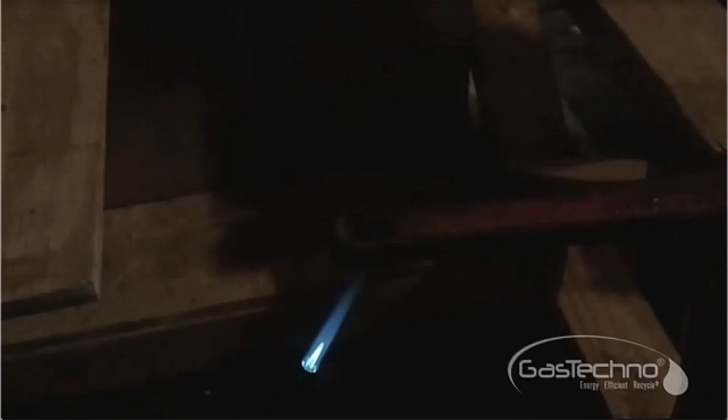December 1st, 2010, we've produced our first production of liquids. We're now going to test the samples. Go ahead, Rich, pour the sample to see. As the sample runs down the hot pipe wrench, you'll see that it's not all water. We've had some excitement here in the last 2 days showing the tests of turning those liquids from our production into flame. We've actually started the liquids on fire, and for us that's an on-site test. If we can burn liquids from our process, we know that we've actually produced fuel as opposed to producing water. That is from converting gas to liquid right there.

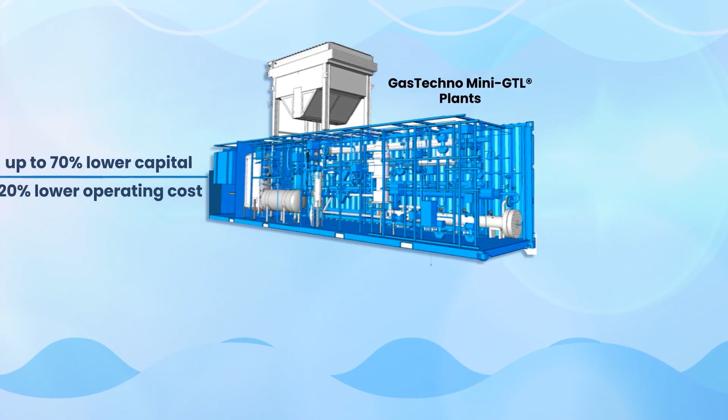In the American garage, the birthplace of many revolutionary companies, is poised to become the world's lowest cost producer of low to negative carbon intensity fuels with its patented, proven, game-changing single-step gas-to-liquids conversion process. In the garage, when the GasTechno team was able to prove the reaction of methane into methanol in its pilot plant, GasTechno Mini-GTL plants produce low-carbon fuels with up to 70% lower capital and 20% lower operating cost. This is a competing technology to the traditional FT Fischer-Tropsch synthesis approach for making diesel fuel and naphtha.

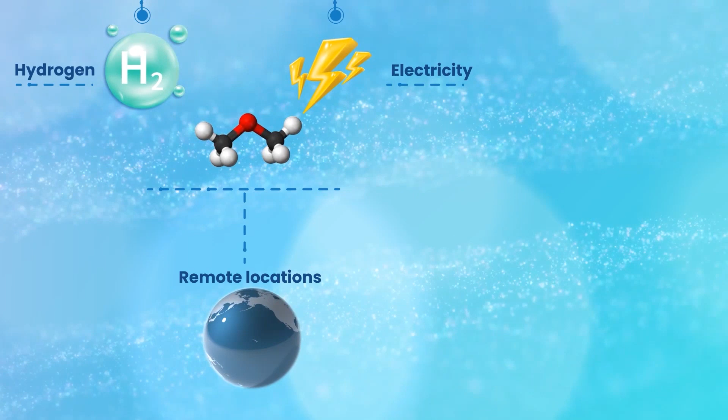Modular GasTechno Mini-GTL plants convert renewable natural gas into low to negative carbon intensity liquid fuels including methanol, ethanol, and dimethyl ether, DME. These low CI transportable liquid fuels can be used directly as drop-in replacement fuels for the transportation sector: trucking, rail, marine, and aviation sectors, where the methanol can be easily distributed and converted to hydrogen or electricity to fuel vehicle fleets in remote locations. GasTechno is poised for explosive growth given the strength of its patent portfolio, proven technology, and the burgeoning demand for low-carbon fuels.

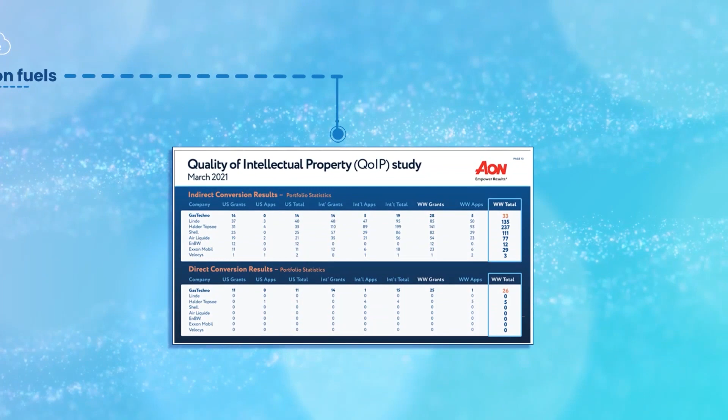According to a March 2021 Quality of Intellectual Property (QoIP) research study by Aon's Intellectual Property Solutions, GasTechno holds the world's largest portfolio of single-step gas-to-methanol patents, exceeding competitors including Linde, Haldor Topsoe, Shell, Air Liquide, ExxonMobil, and EnBW.

History: evolution of the company. 12-year anniversary celebration on December 1st, 2022. GasTechno Mini-GTL has been extensively tested in the field from pilot through commercial scale over the past 12 years, and the company is poised for massive growth as the world converts to low carbon intensity fuels. Let's look at its step-by-step evolution.

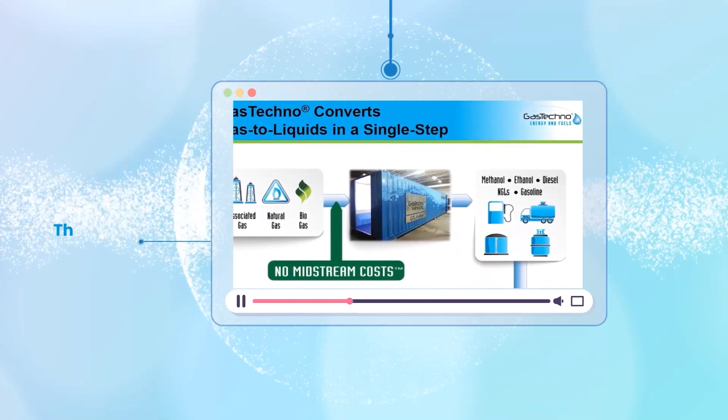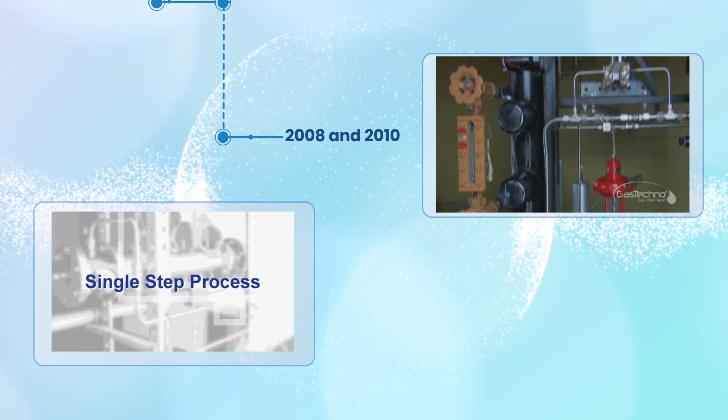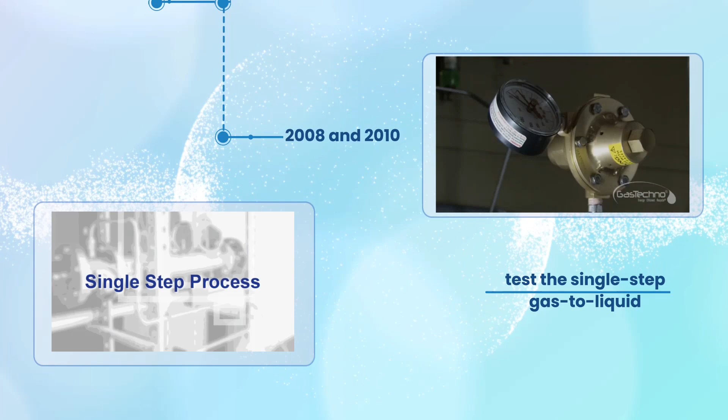It's December 1st, 2010. We've produced our first production of liquids. We're now going to test the samples. Go ahead, Rich, pour the sample to see. As the sample runs down the hot pipe wrench, you'll see that it's not all water. We've had some excitement here in the last 2 days showing the tests of turning those liquids from our production into flame. We've actually started the liquids on fire, and for us that's an on-site test. If we can burn liquids from our process, we know that we've actually produced fuel as opposed to producing water. The primary purpose of this trailer is to bring in customers so that they can see that we are actually producing

Methanol, ethanol, and formalin right from natural gas, right from a methane source.

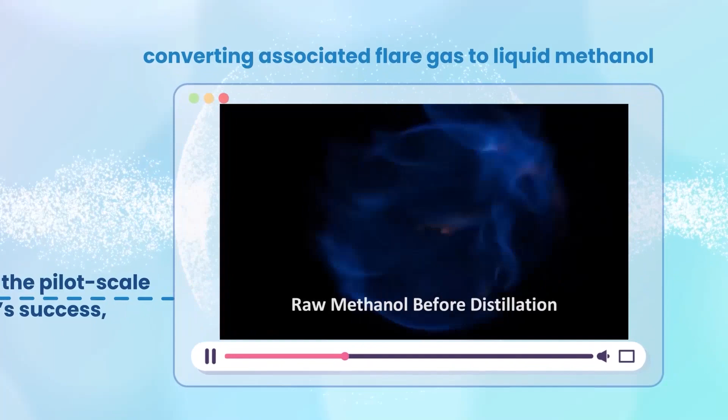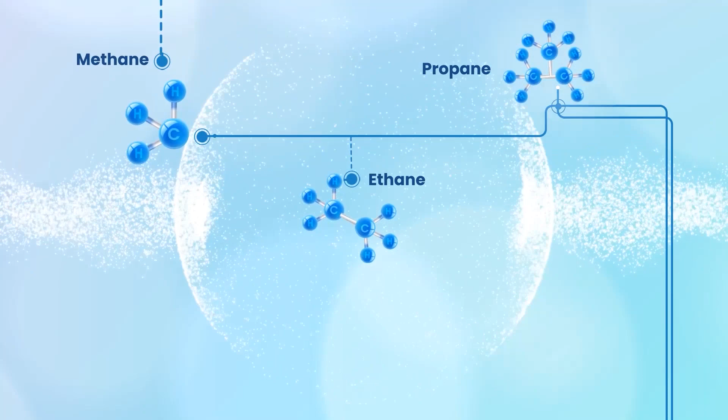It was proven in producing liquid methanol from feedstock gas containing methane, ethane, propane, and 18% nitrogen. In 2012 and 2013, a demonstration-scale mini GTL plant was constructed and operated in the field using both pipeline natural gas and associated flare gas at a site located in Kalkaska, Michigan, to produce methanol and ethanol.

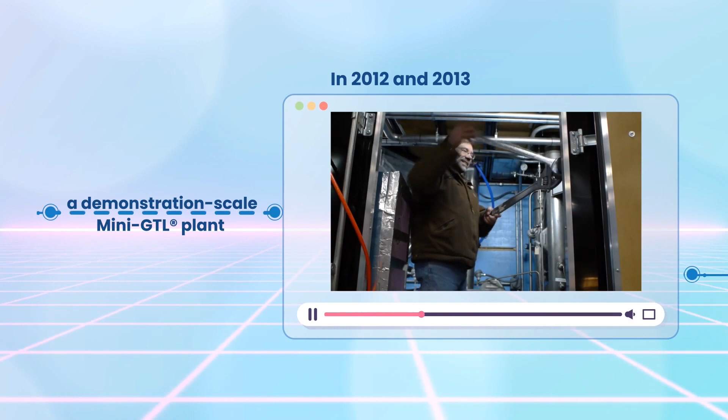Hi, this is Walter Breidenstein, CEO of Gas Technologies. From January to June in 2013, we completed our second plant construction, the portable mini GTL unit.

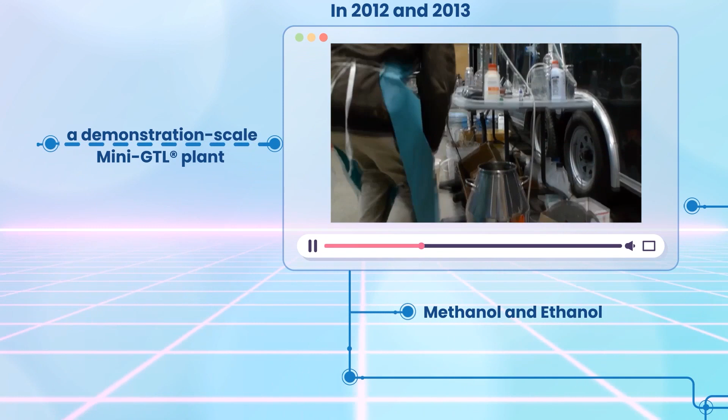With its deep patent portfolio, the spotlight was placed on GasTechno when it was awarded first overall in both the 2012 Intellectual Property Ranking and the 2013 Ocean Tomo IP Innovation Index.

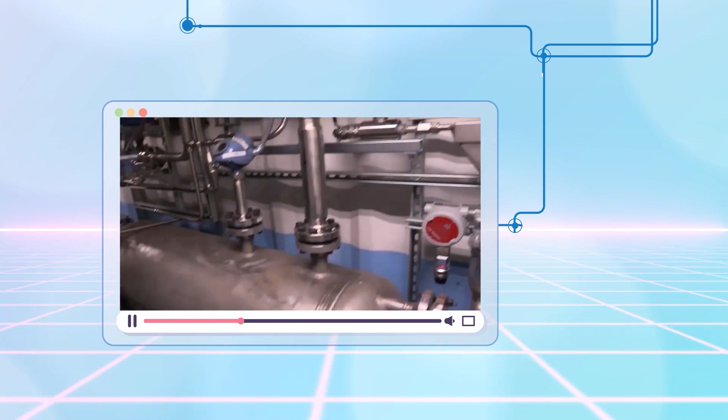That can capture those methane sources and convert them into a liquid fuel that can be readily sold into the market. If you look at a traditional methanol process, it's a 3-step process. If you look at a GTL process, it's a 4-step process. We're a 1-step process. Initiated operation in November 2016 at a gas storage field site located in Ithaca, Michigan.

One of the most significant problems we have today in our generation is climate change. One of the big issues is CO2 emissions and methane emissions.

GasTechno solves that problem. We take gas flares from oil wells or gas flares from landfill. We can take that methane and convert it into methanol, which is a fuel and a chemical, and take away that flare, installing our plant right there on site.

The commercial scale plant was started and tested using air rather than oxygen through a harsh winter, using on-site powered electricity in sub-negative 30 degree Fahrenheit temperatures. The GTL plant and facility uptime operations during these months in North Dakota was near 95%, compared to other competitors.

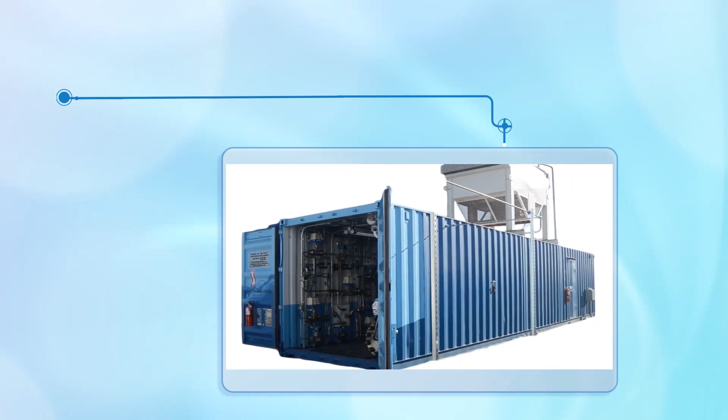Walter Breidenstein lived in a 50-foot Arctic skid shack on site during those 7 months, operating the facility and testing the equipment. A key lesson learned in North Dakota: there has not yet been created the incentives to stop gas flaring of associated gas, given a lack of regulations restricting the practice. We hope that the oil industry will reconsider their position and stop gas flaring in the future.

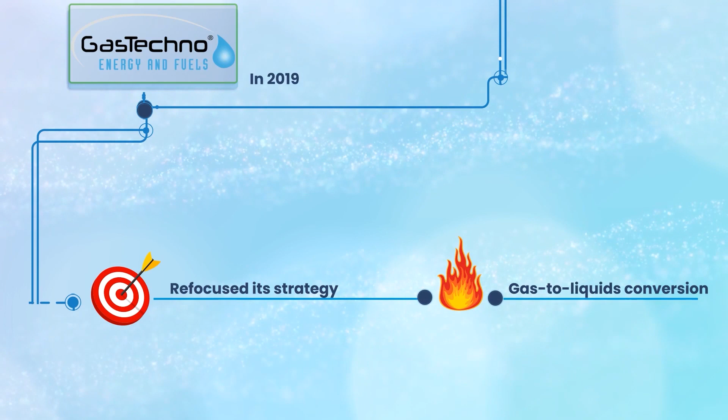Strategic refocus in 2019. In 2019, GasTechno refocused its strategy from associated flare gas to liquids conversion, to becoming the world's leading producer of low-carbon transportation fuels via conversion of renewable gas to liquids.

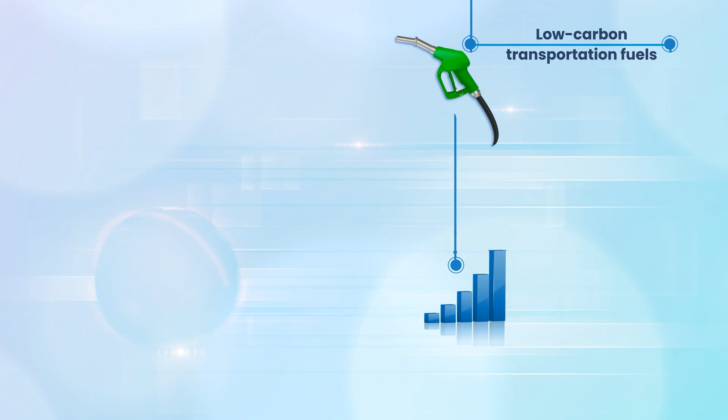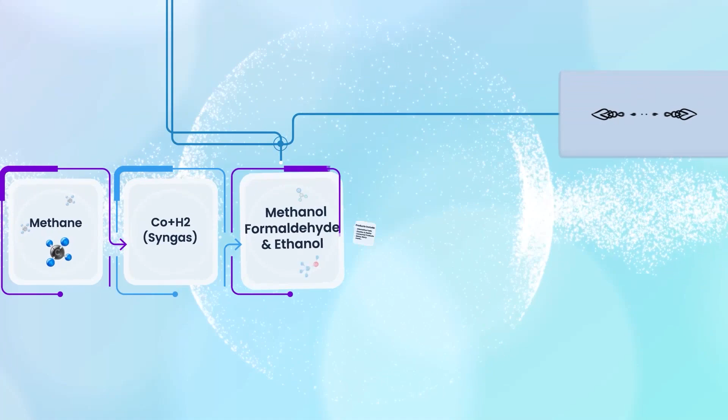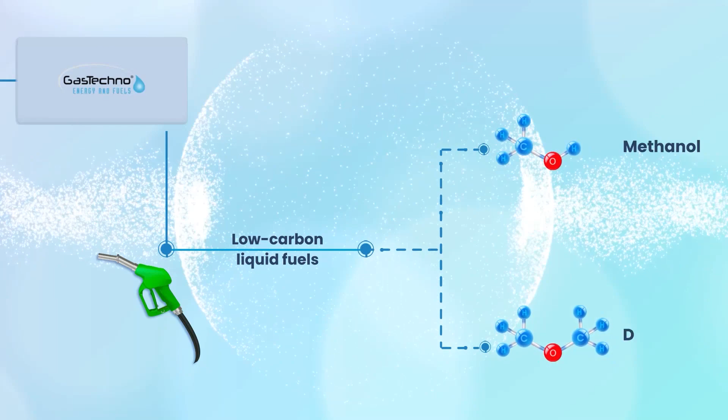The strategic refocus was driven by the burgeoning demand for low-carbon transportation fuels created by incentives under the U.S. Renewable Fuel Standard, RFS, and state-level low-carbon fuel standards, LCFS, coupled with the rapid growth in ESG investing and corporate net zero emission pledges. With its single-step gas-to-liquids conversion process, GasTechno is uniquely positioned to become the lowest-cost producer of low-carbon liquid fuels, including methanol and DME, made from renewable gas or RNG.

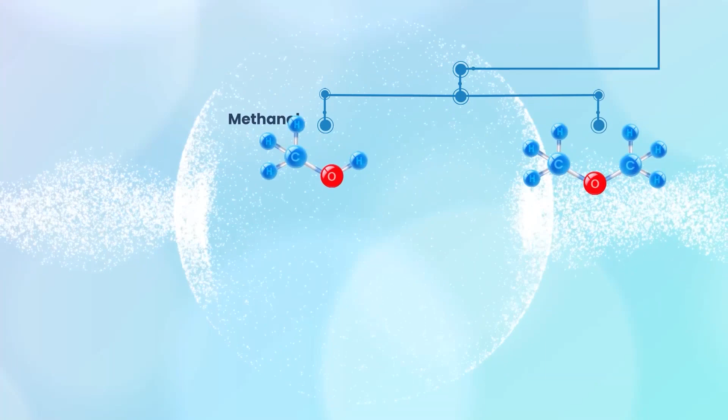The current market is saturated with companies competing to supply compressed RNG, while demand for easily transportable, cost-effective liquid low-carbon fuels is growing rapidly. Besides low-carbon renewable methanol and DME fuels, GasTechno liquids can be easily transported and converted to green hydrogen or electricity for EV charging at distributed locations.

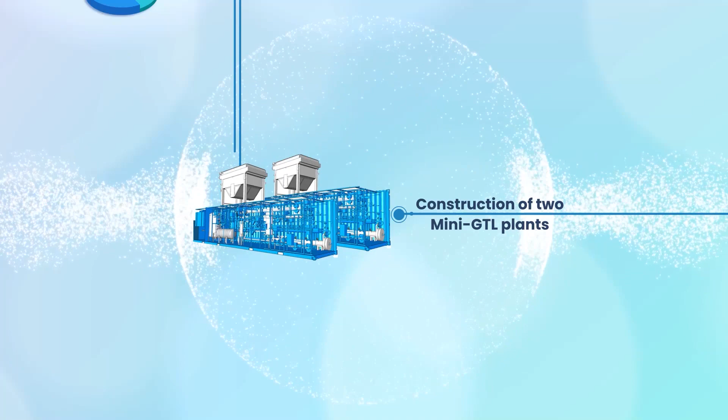GasTechno is poised for explosive growth. In 2021, GasTechno raised nearly $4 million in Series A equity to fund the next phase of its growth, with the start of construction of 2 mini GTL plants to be deployed at its proposed flagship energy center, a retail outlet that will serve as the model for the sale of the full range of low-carbon fuels that can be produced from GasTechno renewable methanol.

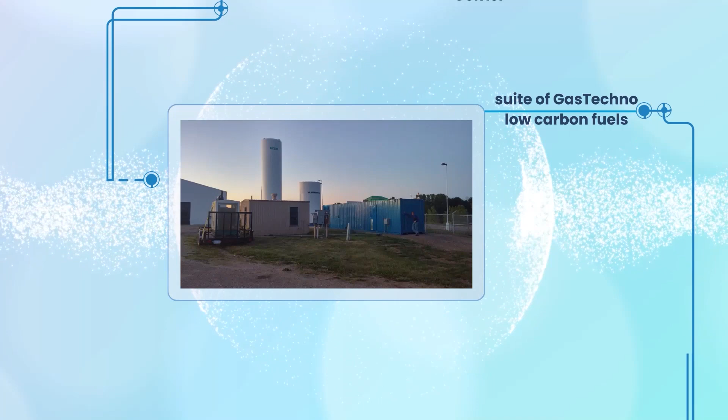Future. In 2022, GasTechno acquired a 36-acre industrial site in Michigan to establish its flagship manufacturing operation and retail GasTechno Energy Center, to produce and sell the full suite of GasTechno low-carbon fuels, including methanol, ethanol, hydrogen, and electricity for EV charging.

With the resurgence in investor support during 2021 and 2022, coupled with ongoing global supply chain challenges, the CEO made the strategic decision that GasTechno will now manufacture its plants in-house at its flagship site.

GasTechno is developing a licensing model for landfill gas and biogas developers that will be funded by its planned SPAC pipe merger during 2023. The company has engaged Winston & Strawn in Houston, Texas, to shortlist SPAC pipe partners that are the best fit with GasTechno.

GasTechno targets high revenue growth within the next 5 years based on the projected spike in low-carbon fuel demand, with support from aggressive decarbonization legislation, including the Infrastructure Act and the Inflation Reduction Act.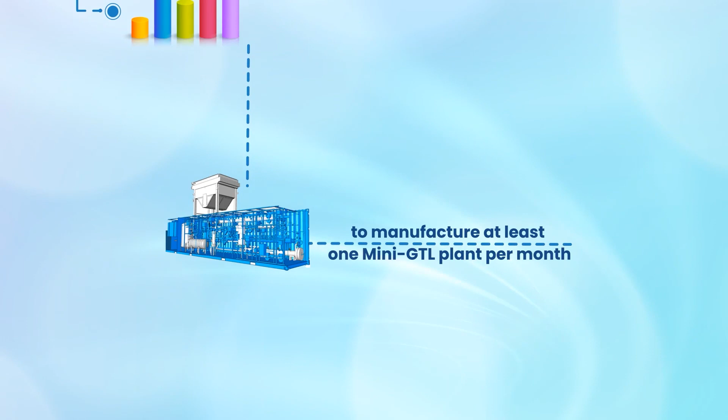To achieve its projections, Gas Techno plans to manufacture at least 1 mini GTL plant per month at its planned Michigan facility, with a target to deploy 30 or more turnkey biogas to methanol renewable fuel projects in 2023 to 2028.

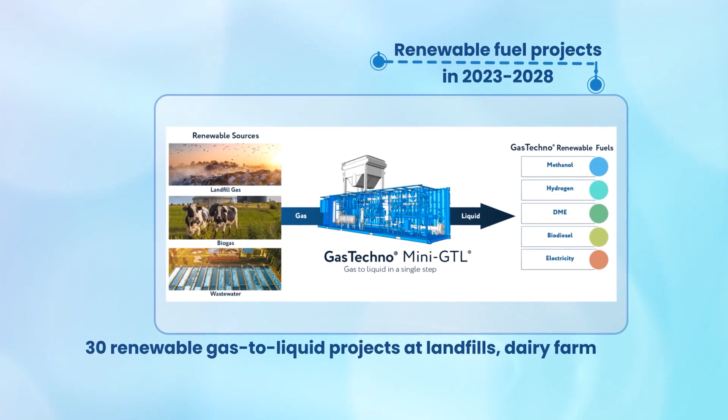Over the next decade, the company plans to develop up to 30 renewable gas-to-liquid projects at landfills, dairy farms, and wastewater treatment facilities, using mini GTL plants to produce low to negative carbon intensity renewable methanol from biogas, for distribution to 27 energy centers across California, Michigan, Texas, and New York.

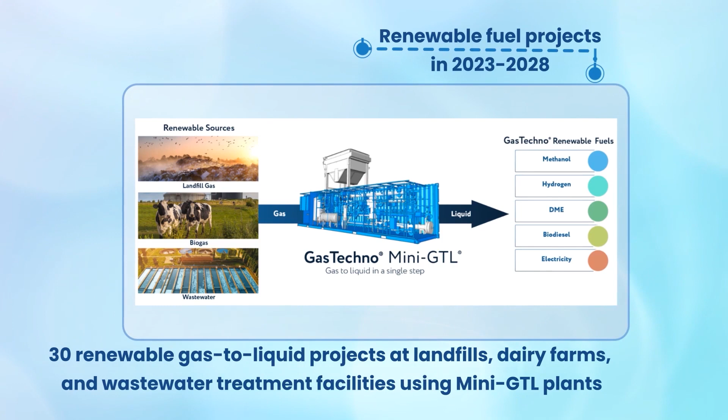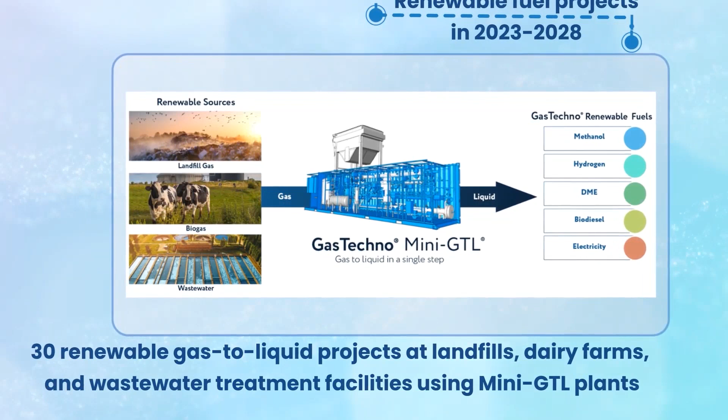Gas Techno Energy Centers will retail a full suite of low to negative carbon intensity renewable fuels such as hydrogen, DME, diesel, and jet fuel, and include electric fast charging stations to serve the medium-duty truck and semi-truck markets.

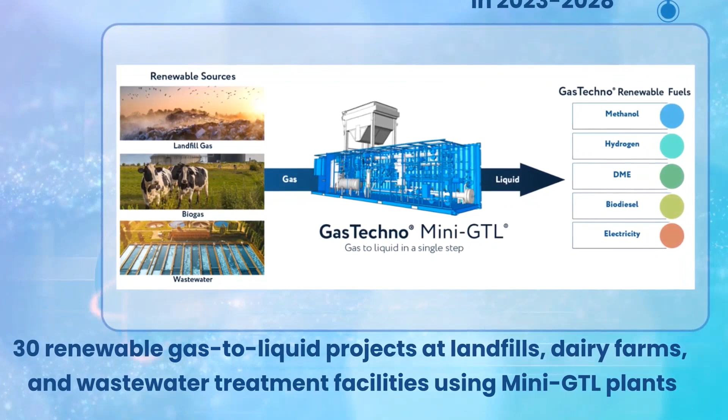Conclusion. On December 2, 2022, we celebrate our 12th anniversary from our first production test in the Northern Michigan garage. It has been a very long journey for the nearly 100 investors and contributors in the Gas Techno legacy starting in the garage.